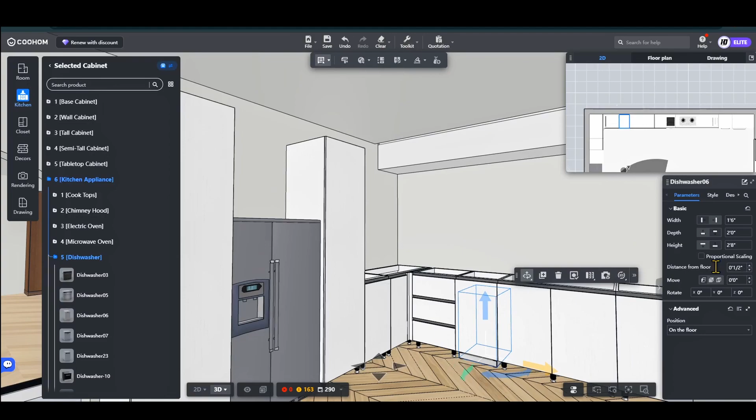Our tall cabinet section is complete, which means it's finally time for upper cabinets. Go back to cabinets, select wall cabinets, and again choose no handle style. You'll notice two options: standard door cabinets and flip door cabinets.

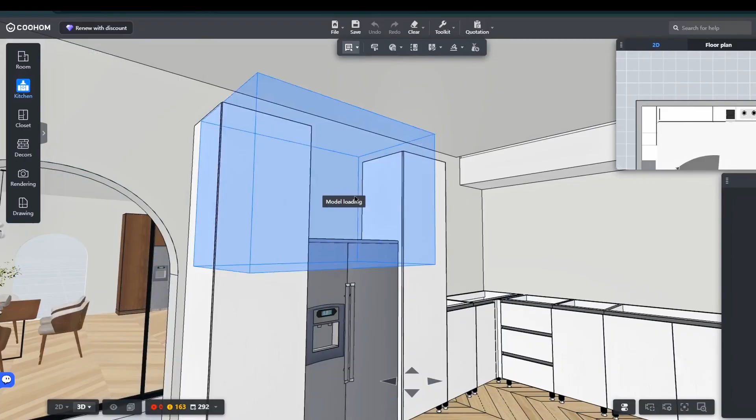For this kitchen, we're choosing standard door cabinets. Start with a double door wall cabinet and place it above the refrigerator. Positioning can be tricky in 3D mode, so switch to 2D mode. Align it carefully, adjust the width, adjust the height.

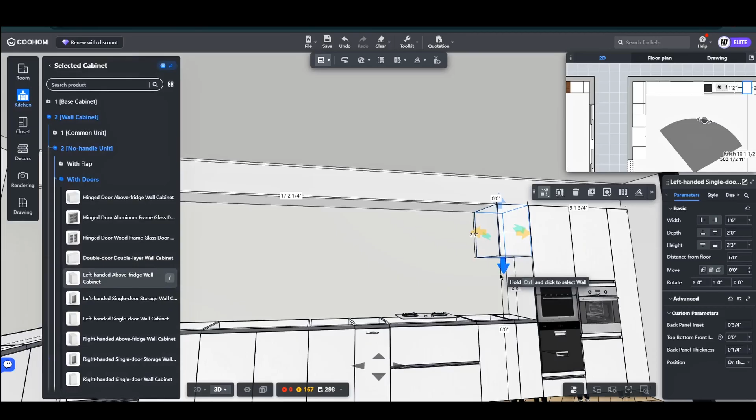Now continue with single door wall cabinets. Place them one by one, then add a double door cabinet. Then continue filling the remaining space with single door units.

At this point, the kitchen begins looking complete. But there's one thing I always check before moving forward: the functionality. Because a beautiful kitchen that doesn't function properly is still a bad kitchen.

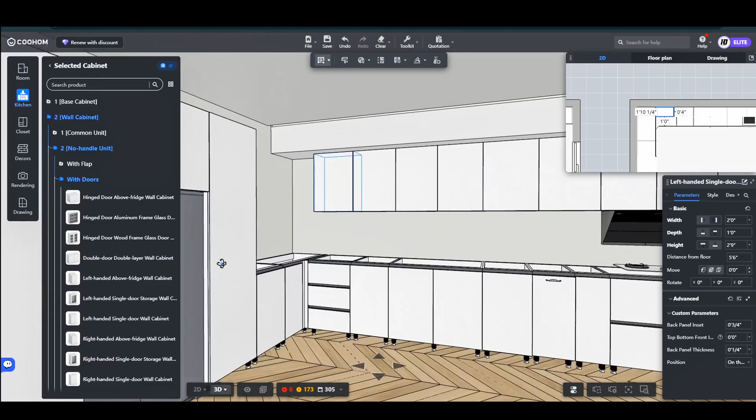Now let's open all the doors with a shortcut, but many beginners don't know this. Press Ctrl plus O. This opens cabinet doors instantly. Now check every cabinet. Do any doors collide? Are multiple doors opening awkwardly? Does the layout feel natural?

This quick test helps you catch problems before rendering. And that's exactly how professionals work. They test first, render later.

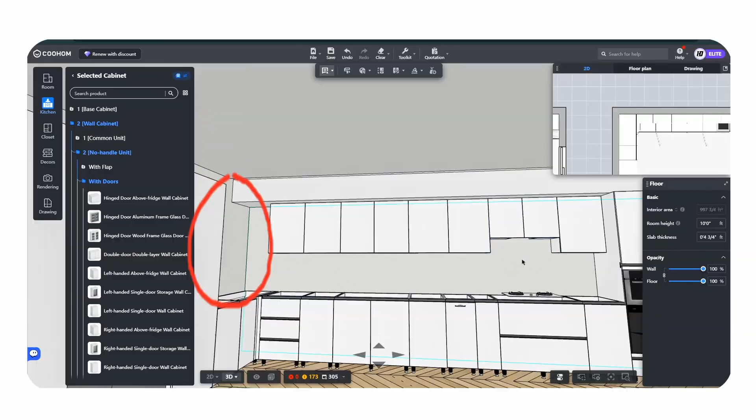Now I want to improve this empty side area. Instead of adding another cabinet, let's do something better. Open auxiliaries, select the shelf option, drag it into the empty space, and adjust it to fit perfectly.

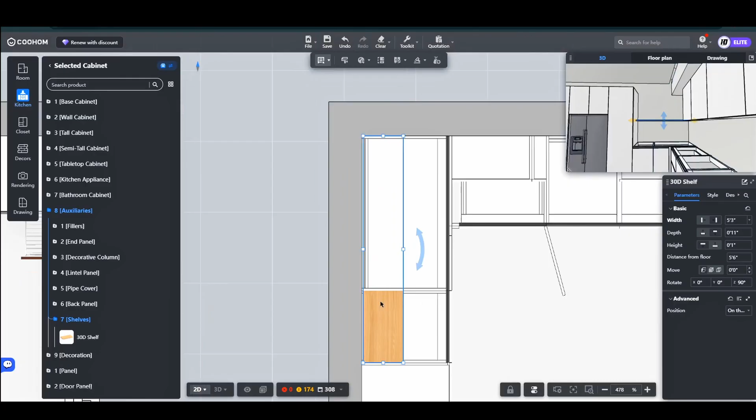Now duplicate it. Place the second shelf above the first.

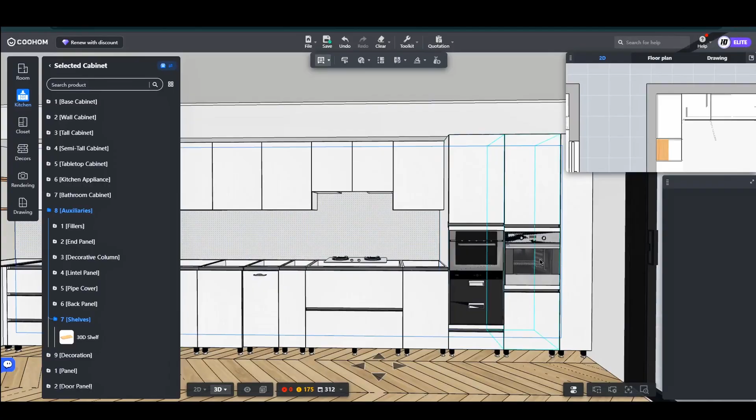And look at the difference. The kitchen suddenly feels lighter, more open, and more custom designed. Sometimes the best solution isn't adding more cabinets, it's adding breathing space.

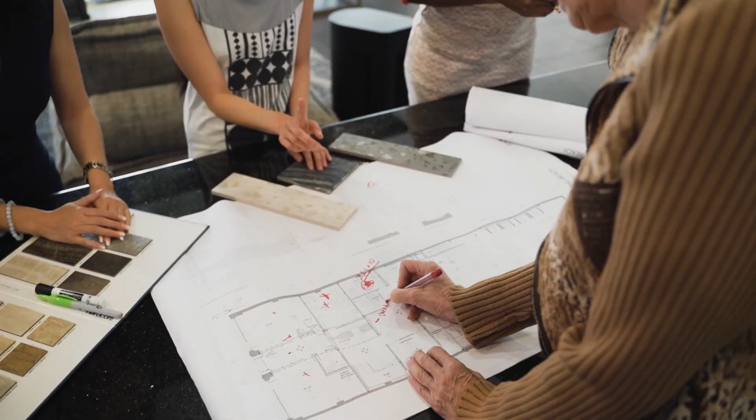And just like that, we've completed the entire cabinet structure of our kitchen. But we're still missing some of the most important elements: countertops, sinks, cooktops, moldings, materials, and the details that truly bring the kitchen to life. So in the next video, we'll complete this kitchen and make it look like a real high-end design.